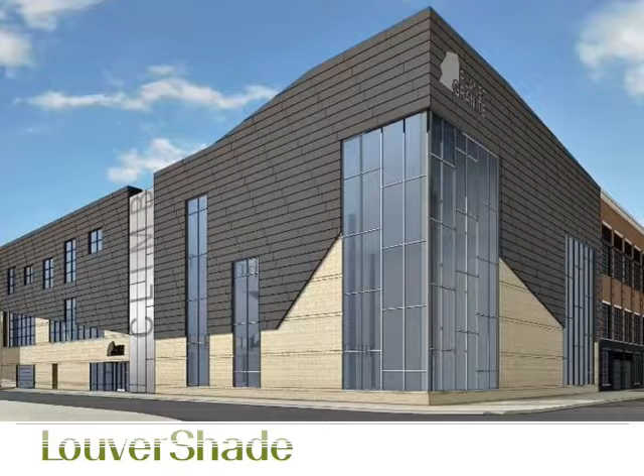So these first two screens represent images that I was able to obtain, and as you'll see, these images are quite diverse in terms of what this project entails. So Brian, what I would really like to do in the context of this meeting is to have a discussion with you. I don't really want this to be a sort of a linear presentation. I'd really like it to be back and forth, and to have an opportunity to share with you and you with us some of the details of what we can provide in terms of state-of-the-art solar control shading.

So to begin that discussion, solar control shading is really the combination of best properties and integrated performance for glazing, shading, and lighting. And I don't think that those are categories of construction that are often thought of as integrated features. But we're here to say that in this modern era of new techniques and best practices, such as net zero energy buildings and Living Building Challenge projects and LEED 4, that there's an ongoing need and desire to have more efficient buildings.

And what we're hopeful of doing today is to give you information about the state of the art as it relates to solar control shading and its role in the integration of these features, which we would refer to as the entire fenestration model, having an effect on curtain walls, windows, skylights, clerestories, and the thermal properties, the lighting control properties of the entire building envelope.

So our most popular project, and I'm going to cover several different categories of combined LouverShade halcyon shading, so that we can maybe drill down into some areas that are specific to your project. Because as I mentioned at the beginning, I don't have the construction documents nor enough detail to understand what you may be thinking in terms of shading integration. So I'm going to touch on several different categories that I think are very important to the best efficiency of your project, and most importantly to the presentation of that building to its clients and tenants and developer and owner.

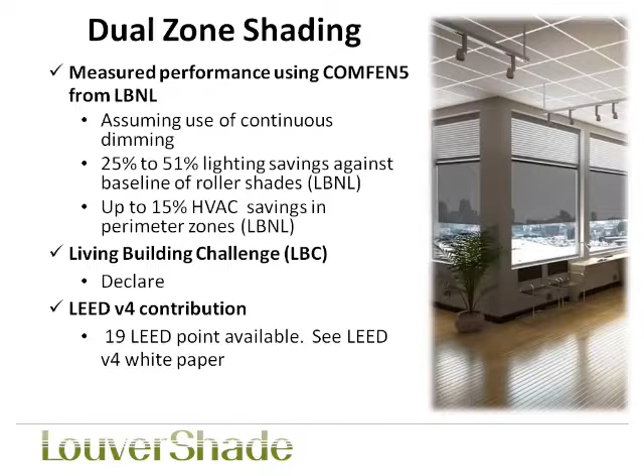This product is also fully certified by the Living Building Challenge under their Declare program. So for red list materials, Declare is specific to certifying that there are no red list components in any of the portions of this product, whether that be the shading material, the brackets, the motors, the control system. It's all red list free. And then lastly, the bullet that identifies LEED 4 contribution, we believe that we can contribute up to 19 LEED points by installing this system in your projects. And I'll break that down for you here in just a minute.

Dual zone shading has a price performance metric that reduces lighting costs and provides light harvesting efficiencies, 100% glare removal, and this glare removal is based upon any solar conditions, so you will always have a maximum amount of natural light and always remove glare from the system.

In addition to that, the research I was referring to at Lawrence Berkeley National Labs, they conducted a survey. We did two different projects there. One was a lab configuration for Lawrence Berkeley, and a second was a full building installation model there at the Dellums Federal Building in Oakland, California.

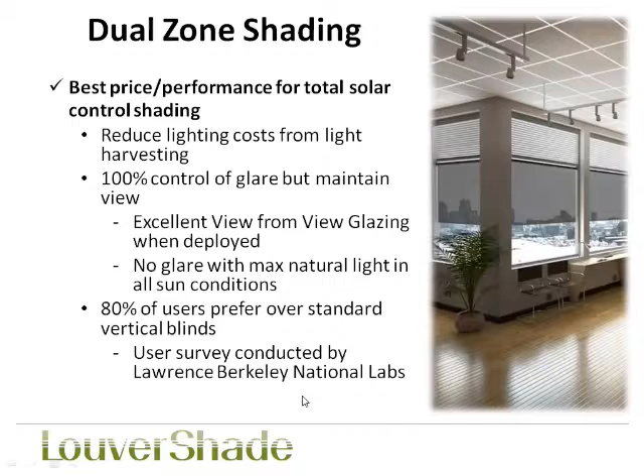And they did a survey at the end where the respondents indicated to the tune of 80% acceptance and preference of the dual zone system over what they had been dealing with, which was a vinyl vertical blind type of configuration. So not only is it efficient, but people like it.

So this illustration shows you kind of the most effective solar condition for natural light. But as you can see, when we have that most effective solar condition, we also have glare. And so what do we do? Our typical scenario is that we lower the shades, we remove the natural light from the building because glare is obviously a very annoying and disruptive condition to live with.

So as you can see, the lights that are shown here are on full, the shades are down, the sun is shining, we have no natural light present in the space. But the dual zone system changes all of that by dividing the glazing surface into two zones. The upper portion you see here we call the daylight glazing or light harvesting zone, wherein louvers are inverted.

As you can see, the lights in the zone closest to the windows are now off, so now we're saving electricity because we don't need the lights to be on in this solar condition where glare exists, because we're making best use of it and using the natural light to light the space.

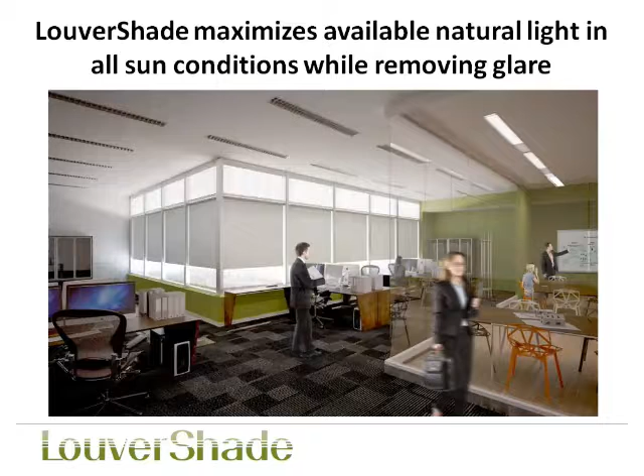And the second, the lower section, which we call the view glazing or glare zone, the shades are lowered, and because of the effectiveness of Halcyon, I'm going to show you in just a second, they are very effective in blocking glare and retaining view for those folks in the office space who enjoy that view.

So I talked a little bit about light harvesting. So daylighting principles for construction, and here's an outtake. I'm going to just step outside here for just a moment. It's very important that in each jurisdiction, in particular for this project in Chicago, Illinois, that we understand what the building codes are as it relates to daylight zones.

Most building codes in the US require a primary and secondary daylight zone. And each of those are governed and regulated by light sensors on the ceiling that detect natural light. If it's a stepped lighting configuration, then certain portions of a fixture shut down when natural light is present. That's a horrible situation for an office.

Most jurisdictions in the US now have mandated that in critical visual task applications, such as an office, such as this project, continuous dimming is the rule. So it's important that you dig into the local building codes and understand that to be the case, because that would be a critical piece of information to deliver at this juncture in our presentation.

So let's assume that this is a scenario where we have continuous dimming as our daylighting strategy in Chicago, Illinois. And so based upon that, I'm going to continue. So the example you see here is daylight harvesting. And this is a principle by which the natural light, as we just discussed, is directed inward and upward into the building space.

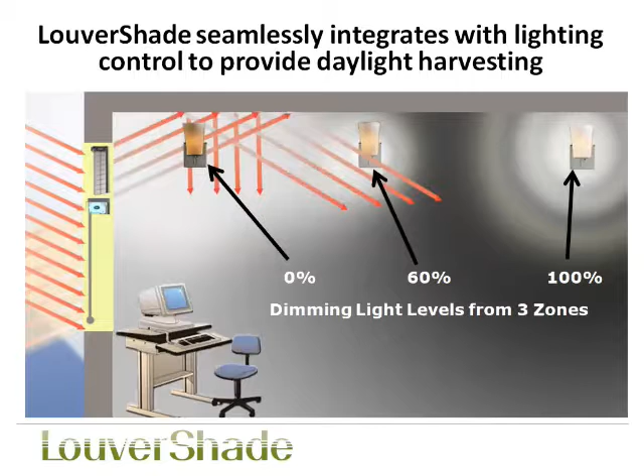So this is another view of this dual zone system. You see the upper daylight glazing, light harvesting zone, and the lower view glazing or glare zone. Typically, the split point between these two, the glare zone and the light harvesting zone, is about 7 feet from the floor. Nothing magical there, but what we're trying to do is to provide a break point so that the tilt of the louvers will prevent glare from entering the space at its farthest extremity.

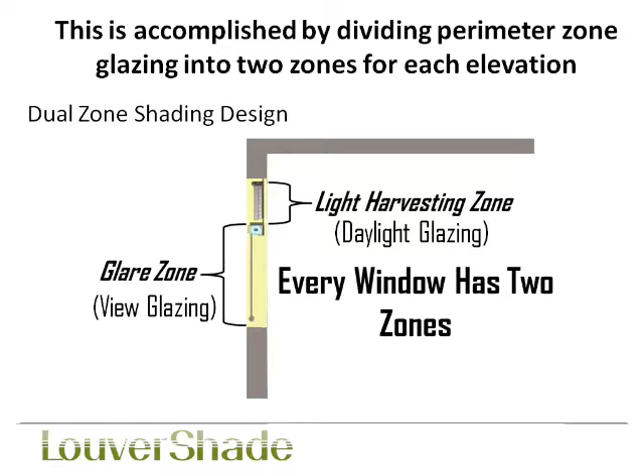So if I have a 100-foot open office area, my break point between these two, view glazing and daylight glazing, will be slightly higher than if I have enclosed cubicles, etc. So that's all part of lighting design, and that's one of the services that we provide at Halcyon, is to help you engineer the proper spacing for the breakpoints for these two components of a dual zone system.

This is another view of those 2-inch inverted louvers that we were just talking about. We cut some slits in cloth and protruded the louvers through and directed light at them. And you see the two things that are happening here. There's the projection of natural light inward and upward, and there is a down shadow angle that prevents glare from entering the space. So this is the magic of this system for dual zone at the upper portion that makes maximum use of natural light in its ability to prevent glare, in a very low cost and effective way.

Halcyon, and here's another outtake. I'm not going to take a tremendous amount of time here because obviously Halcyon folks who are going to be on site will hammer this dramatically. But I will say, now we're back into character here for the presentation to Brian Tesner at Callison.

What I would like to say is that Halcyon has thermal properties and view retention properties that are without peer. This product was selected for the dual zone application and was verified as being the most effective type of shading strategy for a dual zone system, as verified by the research done at Lawrence Berkeley National Labs. So the best way to illustrate this is to show you an example project, a new Google campus in Kirkland, Washington.

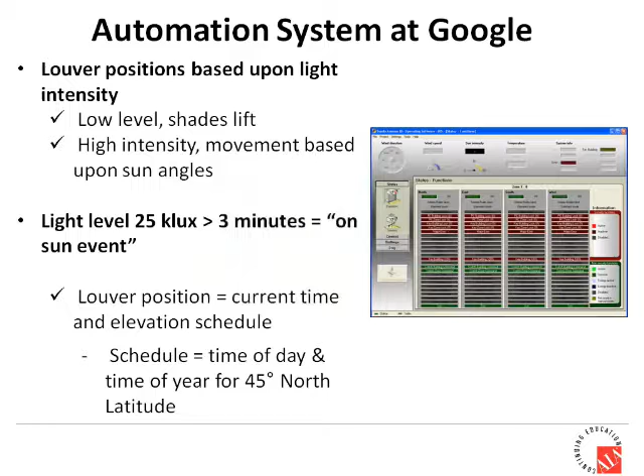So this automation portion that I'm referring to right now only applies to the upper inverted louvers. So there is a notion of determining what we call an on-sun event. When I have high intensity of light, then the louvers must be in their proper position and angle. If I have a low sun event, then frankly, I can raise the shades. If I have clouds and rain, the most effective way to bring natural light into the space is to remove the shades entirely, to lift them so that there's no louver in front of them.

So when I have what we call an on-sun event or an off-sun event, on-sun means that I have sun in the space, and I have to lower the louvers and rotate them. If I have an off-sun event, such as a cloudy, rainy day, then the shades lift. For an off-sun event, that's totally programmable.

In the case of what we did at Google in Kirkland, we actually made the off-sun event happen with a 3-hour delay. So if you have a situation, which in the springtime in the Seattle area, you can have clouds and sun frequently going, clouds over the sun, disappearing, sun out, and so on. And so that would create this scenario where the shades are going up and down all the time.

So if we have a system where an off-sun event is delayed by, let's say, as much as 3 hours, then those louvers will remain until the 3-hour window passes, and then the shades will lift. That's a very good system for not having this distractive up and down motion of shades. So that's what we did at Google.

It's totally programmable. The louvers themselves will rotate at a specific sun angle, and that is based upon the orientation of the building. So this particular example I'm showing you here would be in January, and we know that the sun angles in January are different than they are in July, so my louvers will be in different positions in January as they would be in July, and they will also be at different positions throughout the day.

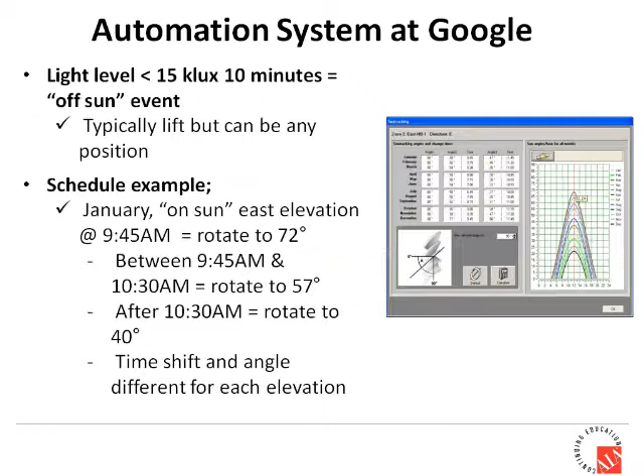If it's 9:45 a.m., they'll rotate to 72 degrees, and as you can see at 9:45, then they'll adjust again, and then after 10:30, they'll adjust again. This is all based upon a schedule that is specific to the region and is also specific to the orientation of the building. So if I'm facing southeast, then I'll have a specific schedule. If I'm facing west, I'll have a different schedule.

Manual overrides are available in all situations. In the manual override instance, the presets would move to a maximum glare control position, so that in this case I've overridden the system, so I have to obviously make certain that I don't have glare entering the space. If another preset override wants to close the louvers entirely, then obviously that's what'll happen.

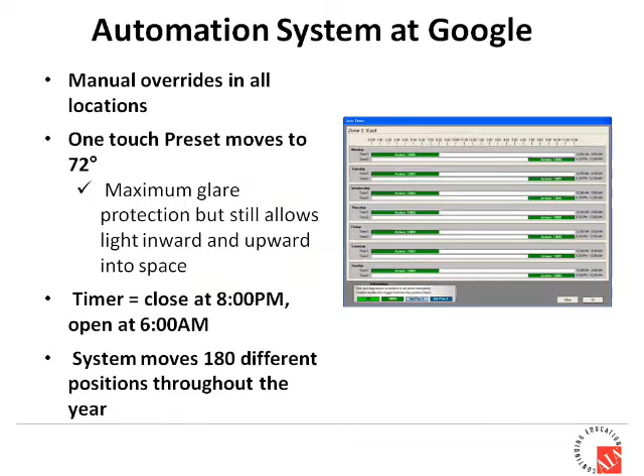Timers are based on a specific time of day, always programmed into the system. And then, of course, there are roof-mounted sun sensors that provide real-time information that determines the on-sun and off-sun conditions. And the louvers will move, as it states here, up to 180 different positions throughout the year based upon all the conditions that I've just described. So this is a very effective system, and it automates the daylight glazing louvers to the extent that they are the most effective possible.

The reason that this is important is in this world of maximum efficiency, exterior shading captures solar conditions to a much more effective degree than interior, to the extent that exterior rack arms and exterior retractable horizontal louvers are some 93% effective in blocking solar energy before it hits the glazing. So it's very popular in Europe, Australia, China, not so much in the US, although we are seeing an uptick by virtue of the many Living Building Challenge and other types of maximum efficiency projects going on.

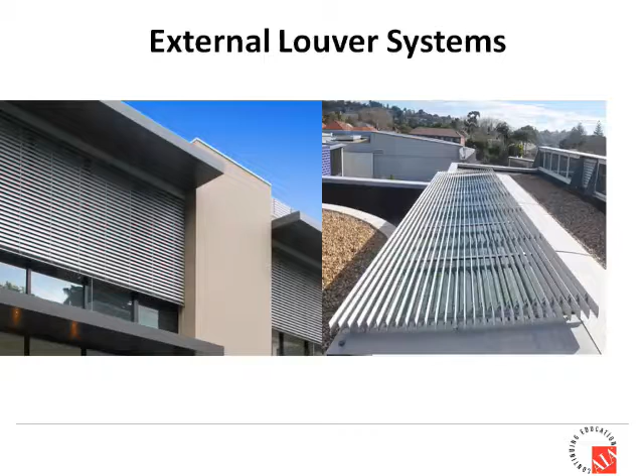So if that's something of interest, we have the best in the business as it relates to exterior products, and I'd love to talk to you about those.

One of the projects we did with our exterior retractable horizontal louvers was at the Kern Center in Hampshire College in Amherst, Massachusetts. This was a Living Building Challenge project where they're trying to meet the objective of a net zero energy building. Obviously, it required the efficiencies of exterior as well as Declare. All of our products, including the exteriors, have Declare labels, which means that there are no red list materials in any of them.

I've already talked about the research that was done for the Green Proving Ground and the Department of Energy's high impact technology research at Lawrence Berkeley, so I won't cover that again. And of course, LEED 4, I'm going to give you an example here in just a second. One of the things I think that's important for you to understand is that all of our products, as I mentioned, are Declare specific. And this is what you'll find if you go to the Declare database on the International Living Future Institute's project site.

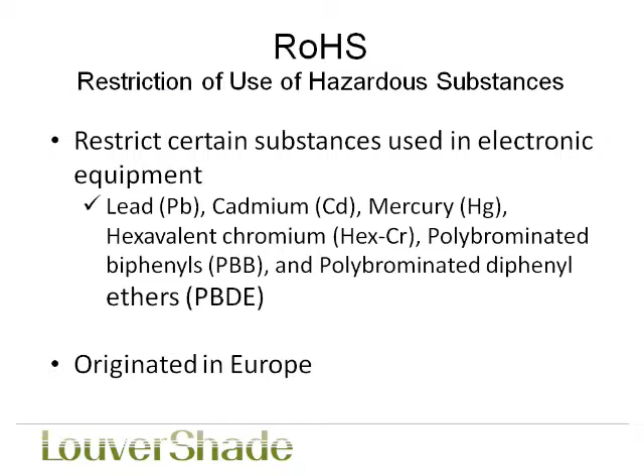RoHS, if you're familiar with RoHS, this is a standard for removing all lead from circuit boards. So for automation and control systems, all of our products, all of our controls are RoHS specific. So we meet all those specifications.

We talked at the beginning about the specifics of our work with Lawrence Berkeley National Labs and the integration of glazing, shading, and lighting as an integrated product. There are certainly other factors as well in terms of specifics for human interaction with systems, the ability to have view when, in many instances with standard roller shades, you wouldn't. Reduced electrical consumption, load mitigation, and all those things that we've been talking about are part of what we would like to help you design into this project there in Chicago.

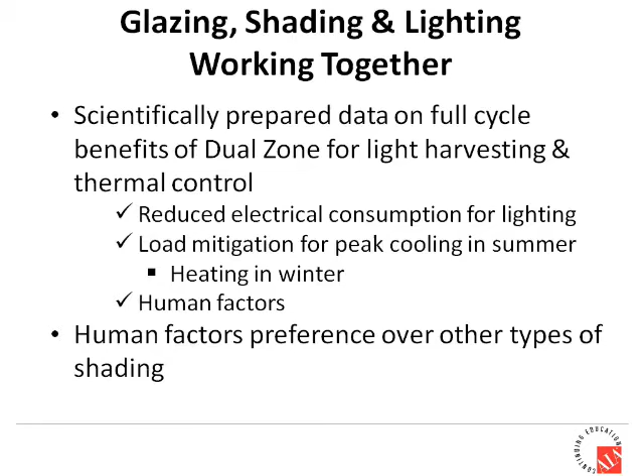And of course, all of these other categories, I won't spend a great deal of time talking about them here, but I think we have a very strong case to make for earning these additional LEED 4 points if your project is attempting to reach LEED 4 platinum status. So I'd love to talk to you about that. All of our folks there on site would like to drill down into LEED if that is part of the goal of this particular project.

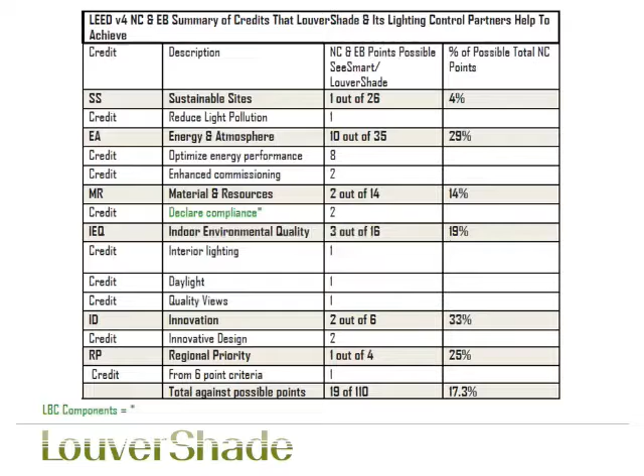It's also important that we highlight what we call a hybrid product, where a portion of the system is exterior and a portion of it is interior. So for example, the Halcyon roller shade could be interior and the louvers could be exterior. The light harvesting louvers can be exterior, either fully with a full drop to the glazing or a partial drop to the glazing, just simply providing light harvesting. We've done a number of these systems.

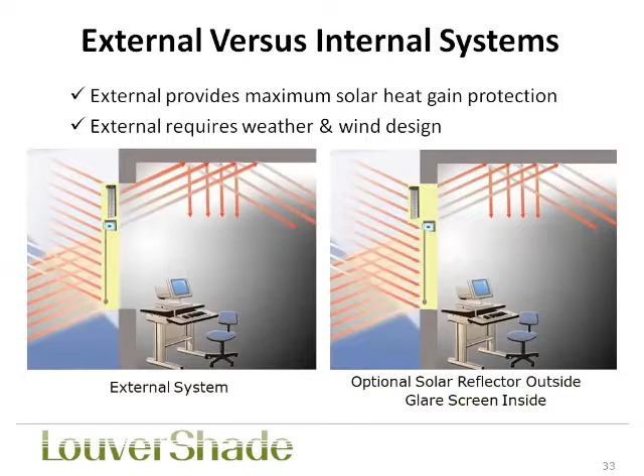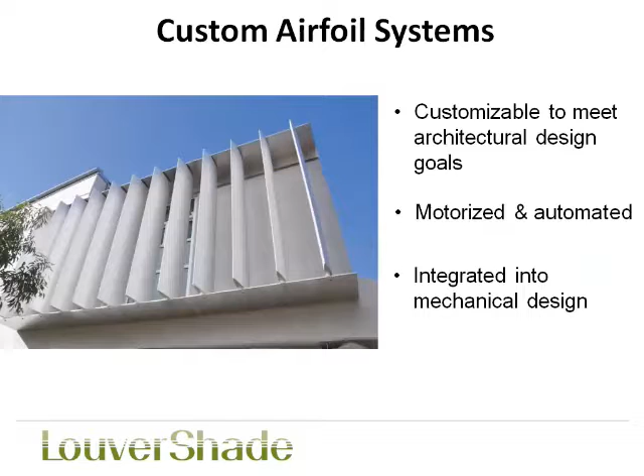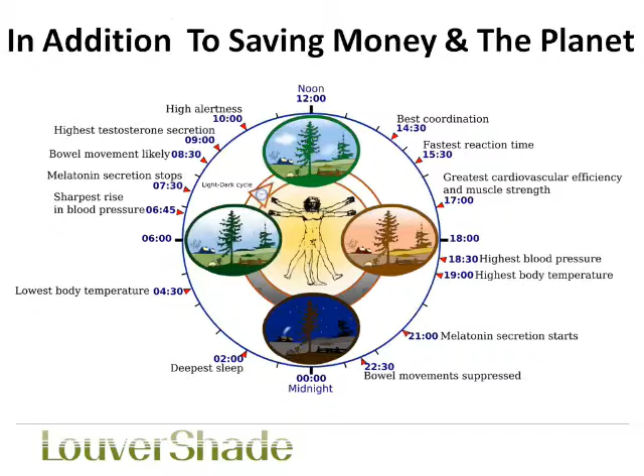And of course, as I mentioned earlier, there are human factors in addition to thermal envelope efficiencies and light harvesting savings, such as the circadian rhythms type of value that natural light provides. Numerous studies point to the value of natural light with better test scores for students in schools, higher sales per square foot in retail, and more rapid recovery in hospitals. So there are other reasons in addition to what we've discussed in terms of the value of natural light in making it available effectively.

And so the only reason I point this out to you is another example, a case in point of our willingness to work with you if you have some areas of customization that you're considering. We'll help you design and take those designs all the way through completion.

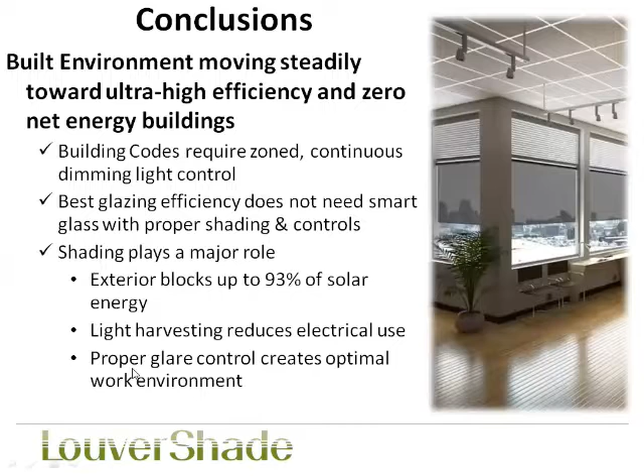So as a conclusion, we know the built environment for all of the U.S., and namely some of the 2030 mandates that are in every state, all led by the state of California. California is sort of the leading edge for all things sustainability in our futures. But we know that building codes are continually migrating toward greater efficiency. Continuous dimming lighting controls are now a mandate specific to light harvesting and primary and secondary daylight zones. Glazing efficiencies are becoming greater over time. Shading plays an enormously important role, and we're here to help you make the best use of shading strategies because that's the business we're in.

Pricing reference, to give you a sense of some of the reference pricing tables. Electrochromic SageGlass type applications, a number of them have found their way into high efficiency buildings. They're enormously expensive. They always have to have some kind of an auxiliary shading system, let's say a standard roller shade. So the electrochromic glass at $75 per square foot would add at least another $20 to $25 per glazing square foot for electrical components, because obviously every window has to be wired for electrochromic. Very expensive. Electrochromic alone is still going to be close to $100 per glazing square foot.

If we look at option number 3 with a roller shade and retractable horizontal louvers, and then add in the cost of low E dual pane glazing, about $59 per glazing square foot. And then we start looking at some of the options we've talked about here today, such as the Google model, the upper motorized and automated daylight glazing louvers and Halcyon lower roller shade, inclusive of the dual pane low E glass at about $40 per glazing square foot, and a manual system, a standard dual zone shade with manual upper louvers and manual lower Halcyon roller shades at about $12 per glazing square foot, and inclusive of dual pane low E at a combined $27 per glazing square foot.

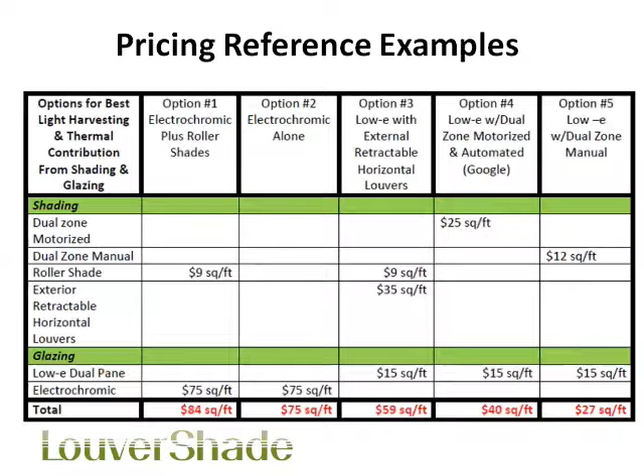So I'm hopeful that the illustration, the examples and detail we provided today would indicate the reason for which we should be working with you to provide the solar control shading solutions.